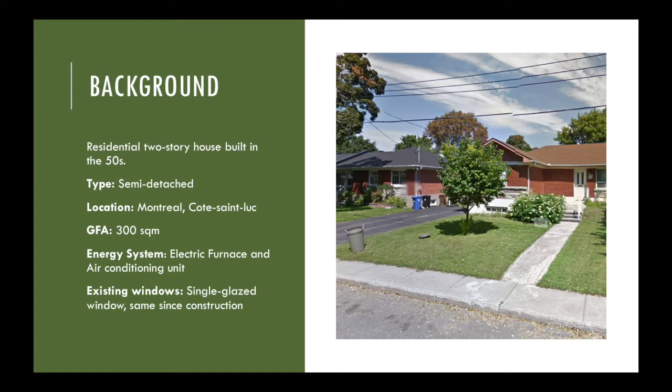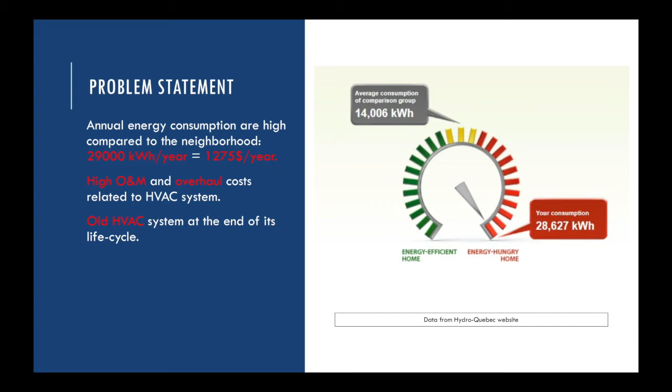The house chosen to be analyzed is a residential two-story semi-detached building that's located in Montreal in the Côte Saint-Luc area. It has a gross floor area of 300 square meters. The energy consumption is extremely high compared to the ones in the neighborhood. The data here shown from Hydro-Quebec indicates that the house uses approximately 29,000 kilowatt hours per year of energy, while houses with very similar characteristics in the same area only use about half of that.

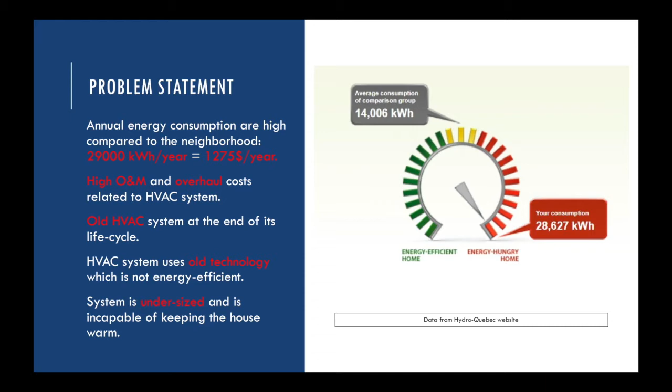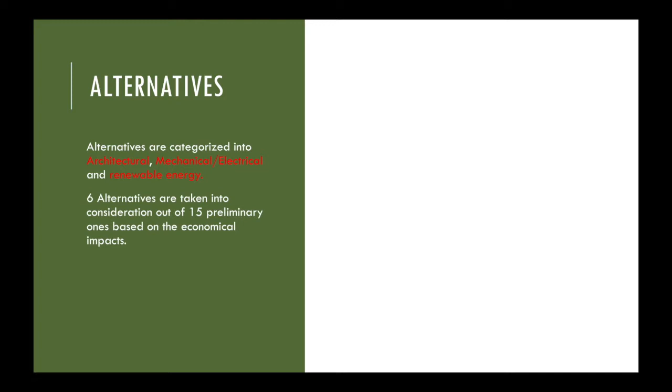The first category being architectural, the second mechanical, electrical, and the third is renewable energy. We've narrowed them down to 6 throughout our analysis, and we are left with HVAC upgrade, geothermal energy, a replacement of the existing windows, upgrading the lighting, increasing the thermal insulation of the building envelope, and solar energy.

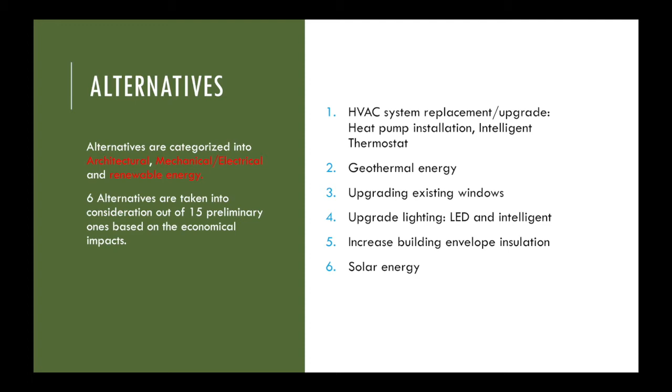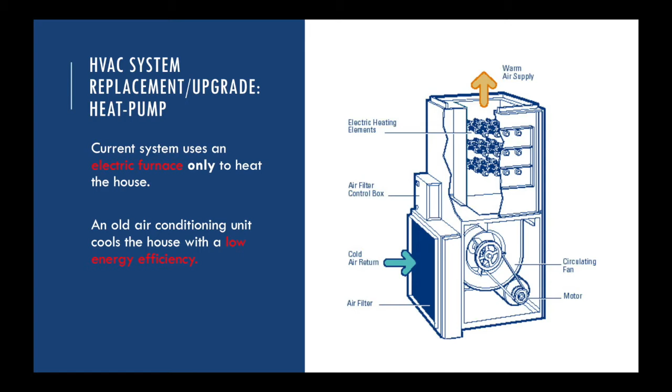The current energy system used to heat and cool the house is an electric furnace paired with an old air conditioning unit with a very low efficiency because it uses old technology. The HVAC system upgrade consists of installing a heat pump and pairing it with the existing furnace. The heat pump is very efficient because it has a coefficient of performance ranging from 3 to 4.

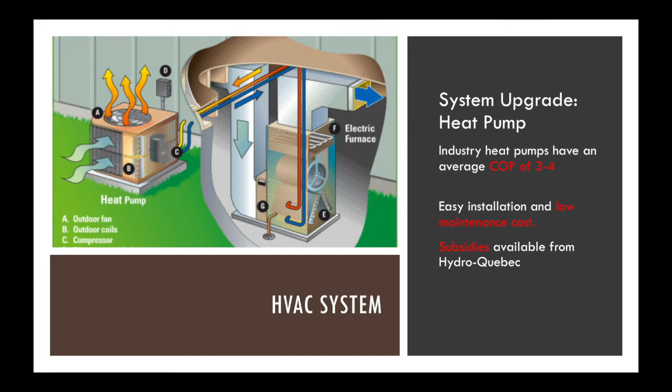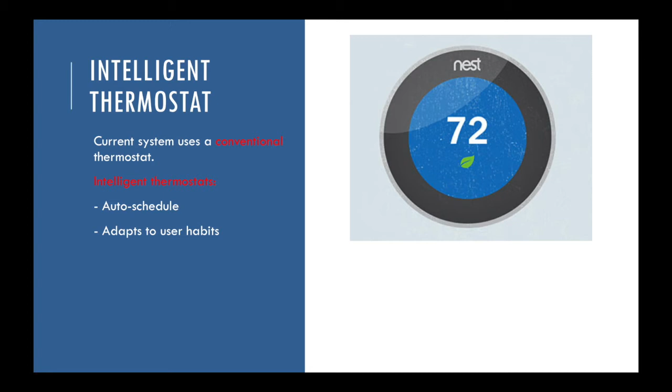HVAC system upgrade could be paired with an intelligent thermostat, which basically adapts itself to the homeowner's habits and sets the temperature in consequence. This allows you to save up to 10 to 12% in heating and 15% in cooling. Another alternative would be to use geothermal energy to heat and cool the house by pairing it with a heat pump, similar to our first alternative. But the advantage here is that the efficiency is constant throughout the year.

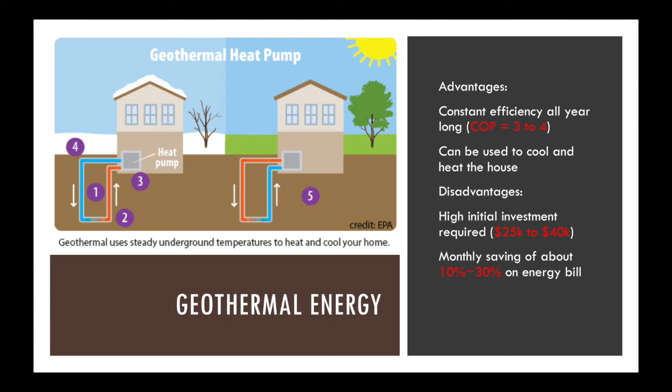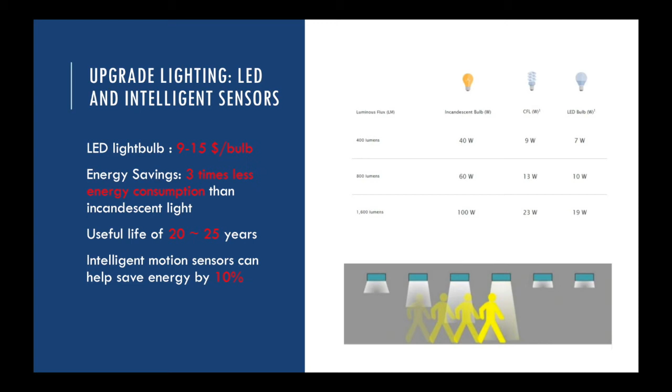Replacing the windows is also a very good alternative to save energy, as single glazed windows have very low R value and basically let cold in or heat out during summer and winter. By replacing the windows with higher R value, we would have less heat loss. A significant energy efficiency measure would be to replace the incandescent light bulbs used currently in the house by LED light bulbs, as they use 3 times less energy to produce the same amount of light. They have a useful life of 20 to 25 years.

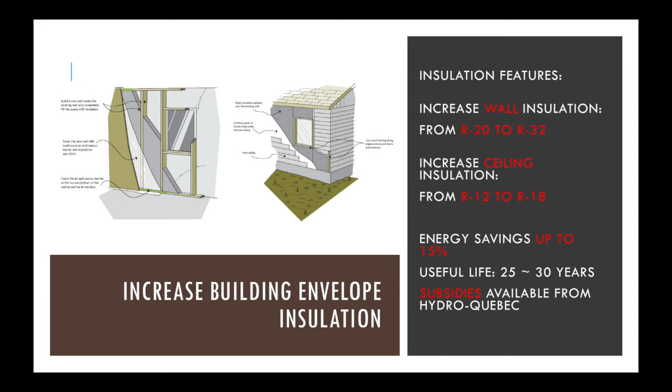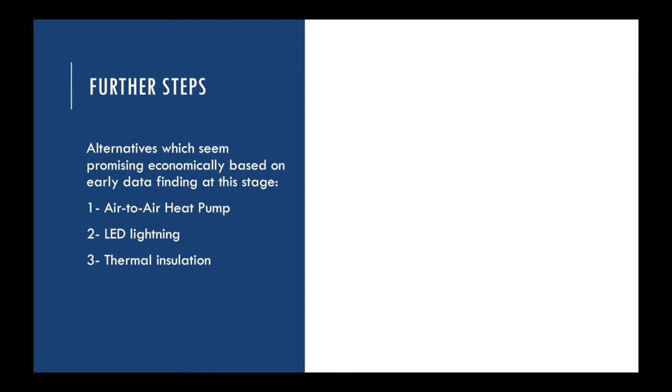At this stage, the alternatives that seem the most promising economically are the air-to-air heat pump, the LED lighting, and the thermal insulation. We will be conducting preliminary cash flows for all of the alternatives. We'll be merging alternatives together and narrowing down our choices, and we'll propose a feasible solution from there on.